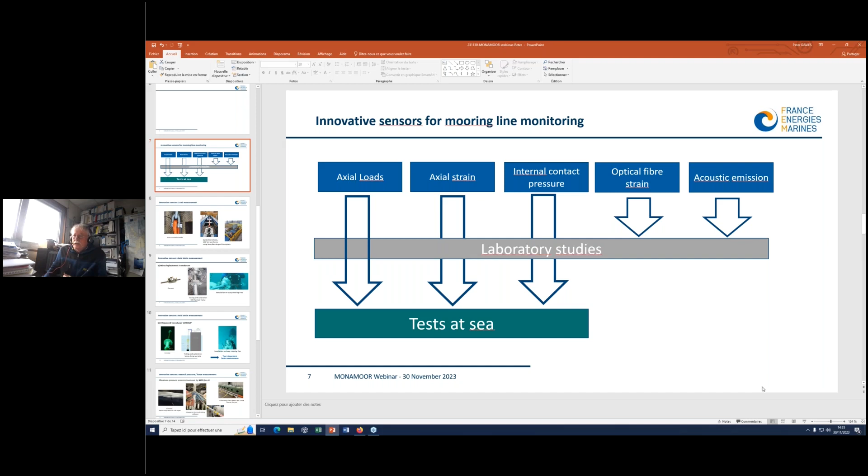So now I'd just like to go on to the next work package, which is sensors for mooring line monitoring. We were interested in looking at a range of different measurements which we could do at sea. These went from the axial loads, axial strains, internal contact pressure, and those three were sufficiently well developed to install them on the buoy. And then we also, in parallel, did quite a lot of work on optical fiber strain measurements and acoustic emission.

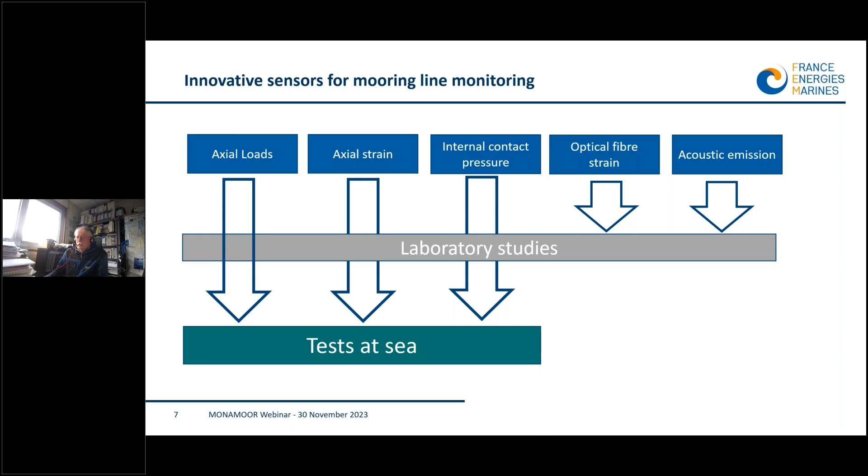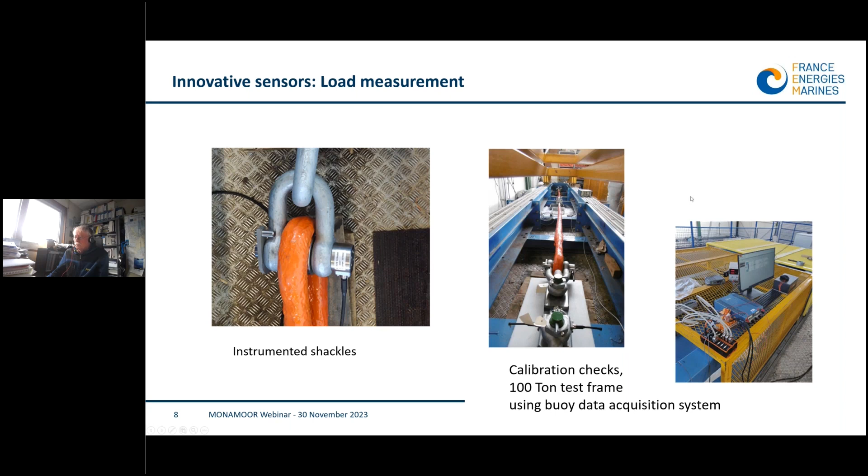So the first of these so-called innovative sensors was in fact one which didn't require any development at all, which was off-the-shelf load cells, as we needed the load measurements so that we could correlate and synchronize with the strain measurements, and also to have a recording of what the line was actually seeing. So all we did with those, which were bought by FEM, is we checked the calibration on our 100-ton load frame, and then we did some work with the data acquisition system to make sure we could get a synchronization between the different measurements. So that was fairly straightforward.

The second one was axial strain measurements. We have two types of transducer. The first is a wire displacement transducer. It's something which we use on the test frames for measurements in the lab. So the main difficulty was making it waterproof and fixing it so we have a measurement over a reasonable length.

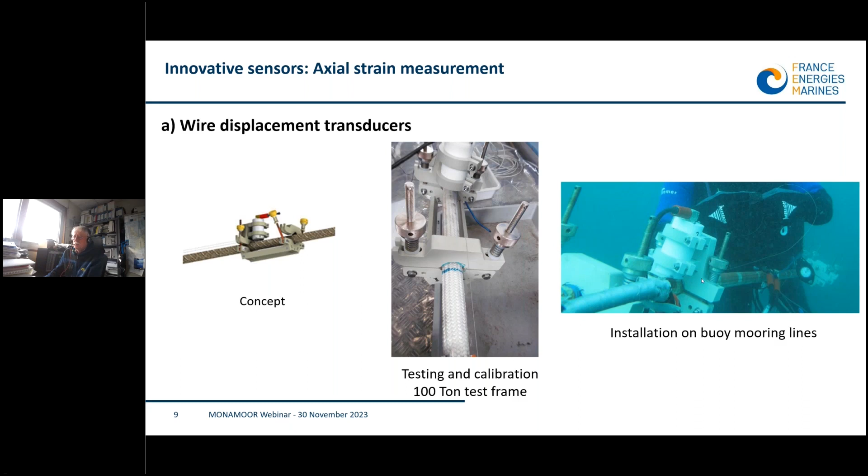A second way of measuring displacements on a system such as this is by ultrasound. So we have a system with an emitter reflector which is on one clamp, and then a target on a second clamp. This is something which we have used to some extent in the past. It was calibrated. We have a tower in the estuary in Brest, and so we were able to perform some tests in sea, as this works only in water. And then we had a second system with a wire displacement transducer, so we could correlate and calibrate and check the measurements we were making on this system.

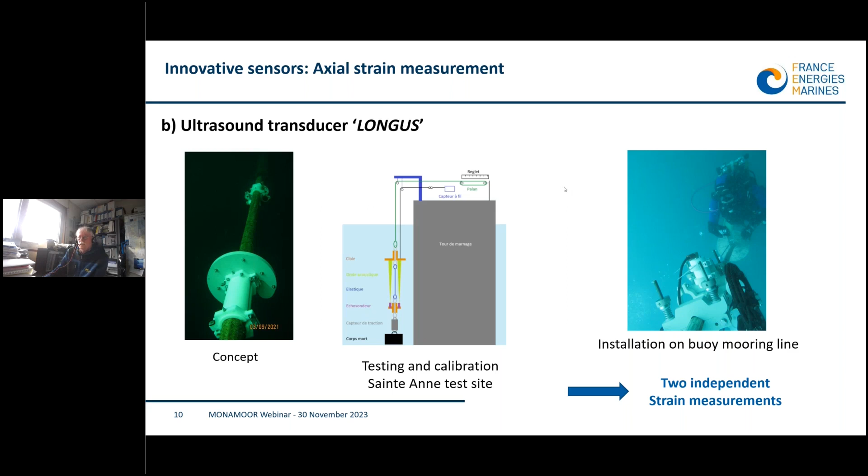The third system, which is perhaps more innovative, is the pressure sensors, which were developed by NCD, which is a small company in Brest. And the idea is to put a transducer inside the rope. So we did a lot of testing, preliminary testing on sub-ropes. And the idea is to measure the pressure between the strands. And that gives you something which you can correlate directly with the modeling, but it also gives you a handle on the load in the sub-rope, as you can calibrate it to get back to the force.

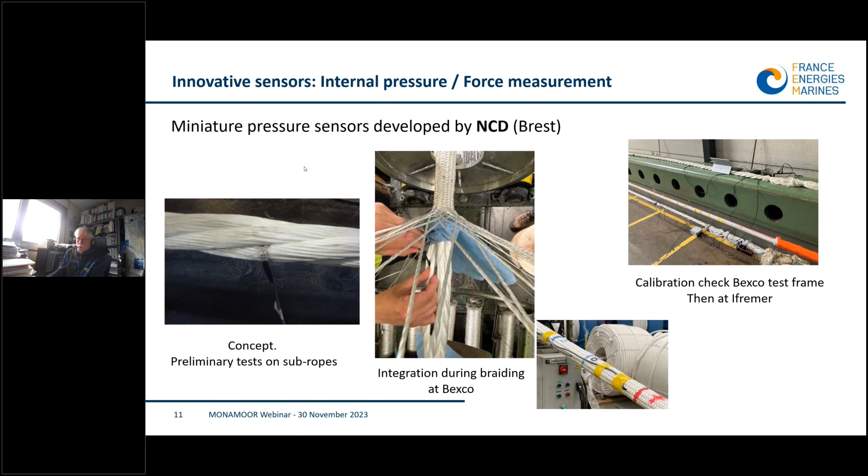Then we had initially the idea to use the polyamide fibers as waveguides to measure elongation, as you can do it with glass fibers, but the elongations aren't long enough. We tried it on the polymer yarns, and it didn't work very well. The attenuation was too high. So eventually we went to PMMA fibers, and then we did quite a lot of work on calibrating those, looking at attenuation, the mechanical properties of the fibers, looking how seawater aging affects the mechanical properties, and also looking at sensitivity to abrasion.

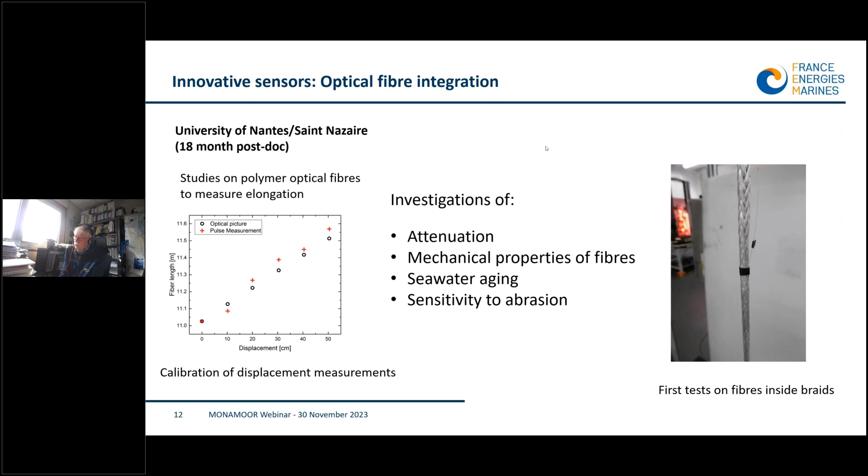And then at the end of the project, we did the first tests on fibers inside ropes, in this case inside braided ropes, in order to check we could actually do it inside a rope. There's still a lot of work to do on this, and it wasn't complete in time to go on the buoy, but it's work which is ongoing. And the main difficulty is upgrading that to large ropes and understanding what you're measuring when you work on large twisted ropes. So there was a postdoc for 18 months at the University of Nantes and Saint-Nazaire who worked on this project, and we also worked on it at Ifremer.

And the final type of instrumentation was acoustic emission. We worked with the University Gustave Eiffel, who have a lot of experience of this for steel cables, as they use it as an in situ alarm system. And so they developed a special clamp, so we could use it on the sub-ropes. We worked on the sub-ropes initially. We went on sub-ropes up to failure, and then we transferred it to the full-scale rope.

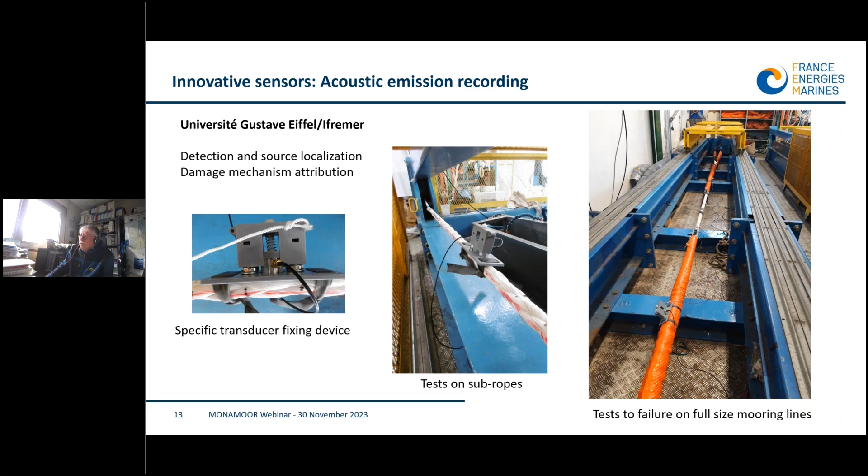And this is an example on the 100-ton test frame, where we have 4 transducers, which allow us to localize the damage. We got very nice acoustic emission signals, which we could then post-treat and look at the amplitude analysis and the energy analysis, and we're now trying to correlate this with the different mechanisms, particularly fiber breakage and abrasion. So that was working quite well. It was developed quite nicely at the laboratory scale, but it needs to be upscaled, so we didn't use it either on the buoy.

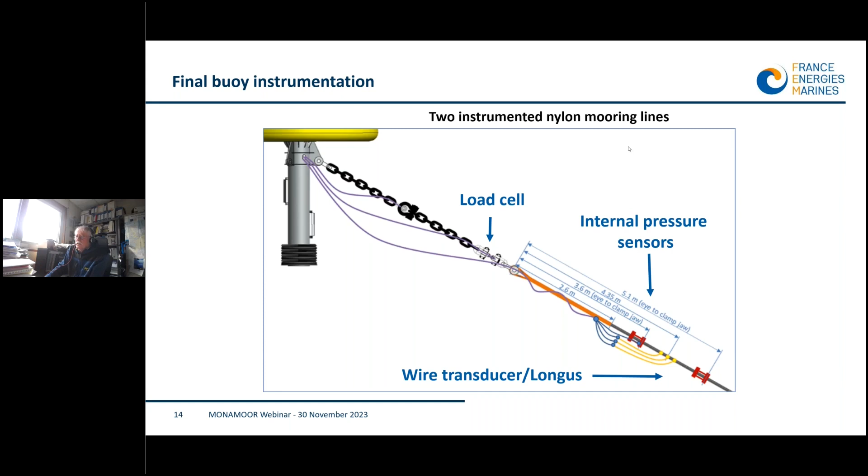So finally, we had 2 instrumented mooring lines on the nylon parts of the mooring line. And that included the load cell, the internal pressure sensors, and the 2 types of strain measurements or displacement measurements, which we could then superimpose and correlate with the other measurements to then go back and correlate with the model. And so I think in the next section, Jean-Sébastien and Romain will talk about the buoy and the dimensioning of that, and what we actually measured on the buoy at sea.